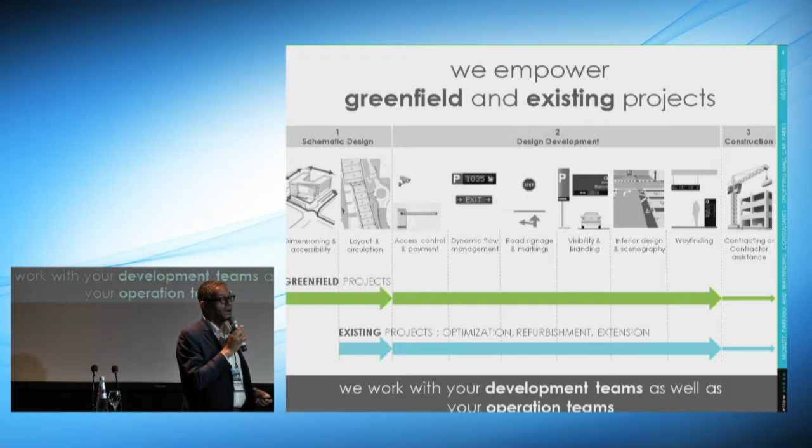On greenfield projects, we cover everything from how you dimension the car park, where you put it, why it should be underground or overground, and how you deal with the accesses and exits, where you put the ramps, how many, and why you should put them there.

Then when the structure is done, we move into the internal layout and circulation, then all the access control concerns, parking guidance, and dynamic flow management.

We also have a dynamic exit management, with sensors implemented on the exits that would detect eventual go-slows on exits and send the traffic to other exits.

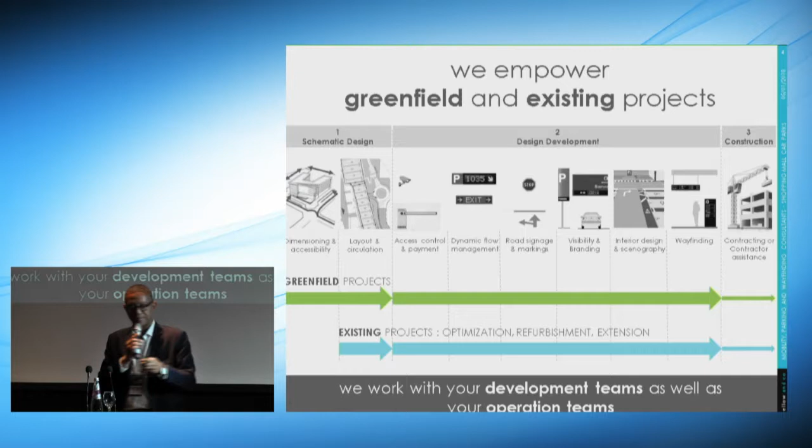Then once that is done, we have the enforcement and the standard signage, that's road markings and enforcement signage. And this is what I would call the customer experience or design/branding part of it, with branding the entrance and the visibility of the entrance, then differentiating the different levels or different parking pockets.

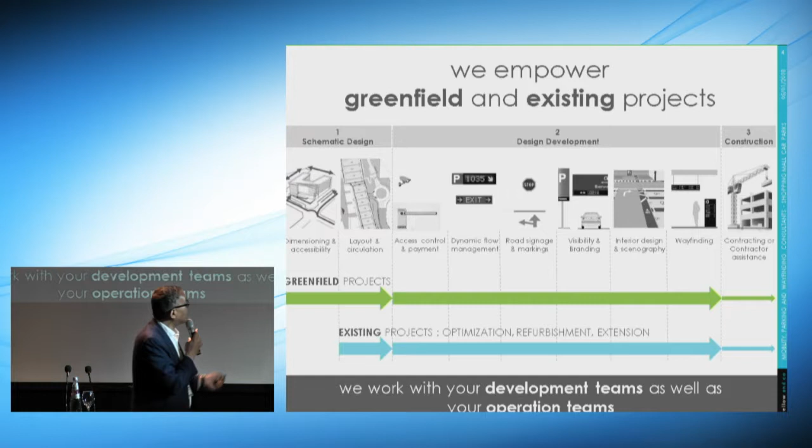And pedestrian wayfinding. Then the contracting, we will just be assisting your local contractor and not trying to replace him, in different countries where you have different languages and different cultures.

So we consider ourselves as parking designers specialized in shopping malls, for the simple reason that the customer who gets to the shopping mall, until he's gotten rid of his car, is just a potential customer.

He's not yet a customer because you cannot cash anything from him, you cannot sell anything to him. So he is actually the official supplier to the mall.

This means the car park is built to have the maximum amount of monthly subscriptions, and that means traffic that doesn't move. Cars parked, people know their slots, they know how to get in, and there's no problem. So to deal with this, you're actually designing to put the maximum amount of bays, because every extra bay you put in your car park is extra revenue.

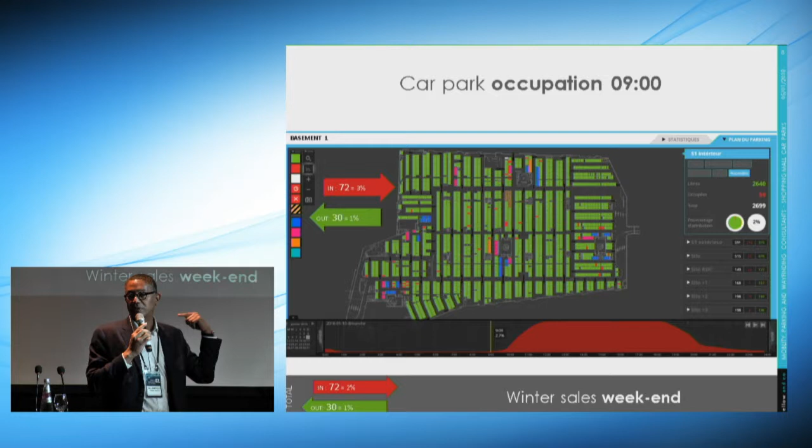So it's paid, but no one pays. It's actually just making sure that no one - since it's close to the airport - drops their car there when going on holidays. The other entry exit is here.

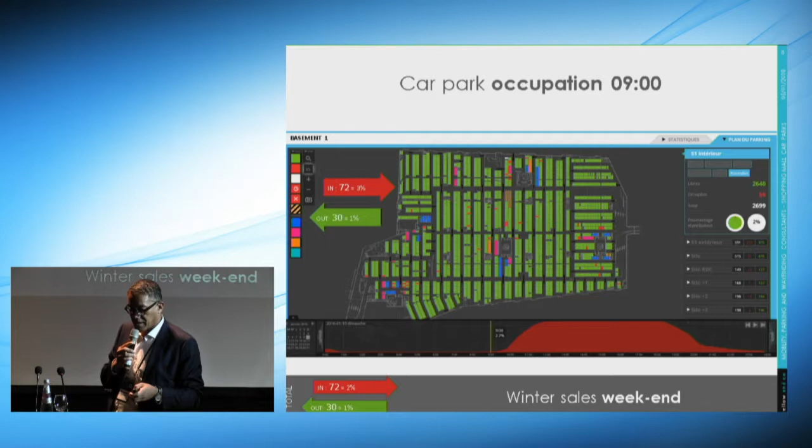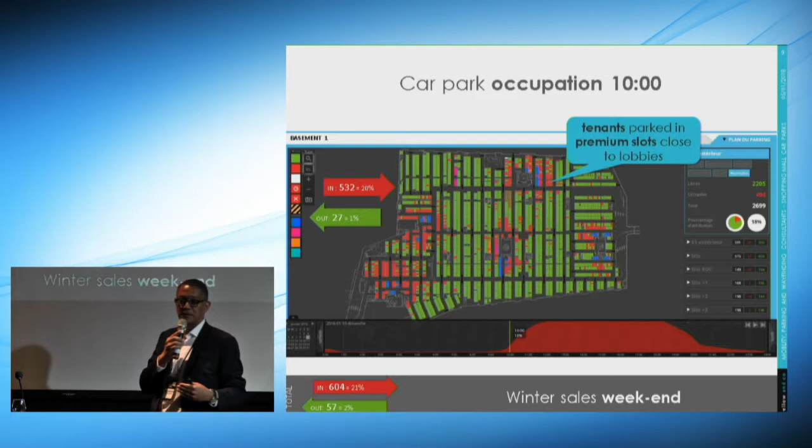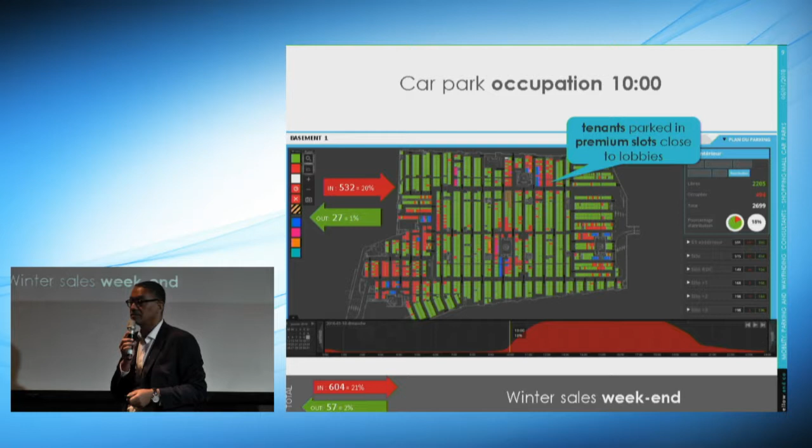So this is going to be what happens in the car park on winter sales weekend, meaning high attendance. It's 10 o'clock. The shopping mall opens at 10, so the cars parked here in red are cars that parked between 9 and 10 - these are most probably the tenants. In other words, the people working in this shopping mall are already occupying 18% of the car park and have taken all the premium slots, and they're not moving for the day. It's not very positive as far as sales are concerned.

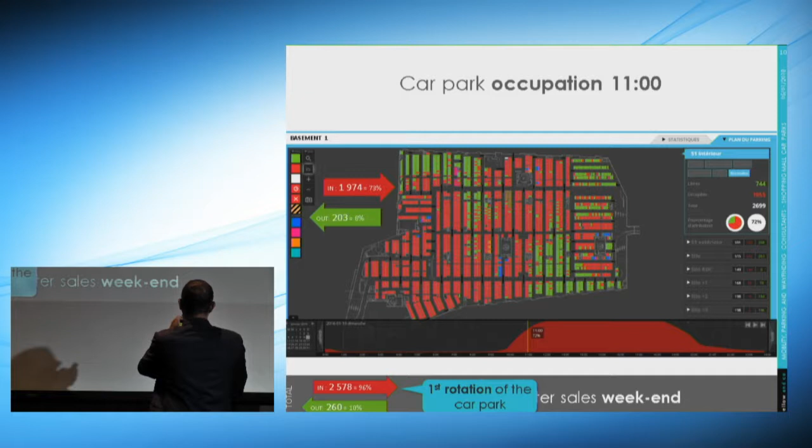We can see that customers are intending to come because just 1 hour later, we're already at 72% full. 1 hour later, that's 12 o'clock, we are now at 95% full. It's 1 o'clock, we're 98% full. It's 2 o'clock, we're 98% full again. It's 3 p.m., we're 98% full. In other words, nothing happened in this car park - it was just 98% full for the past 3 hours.

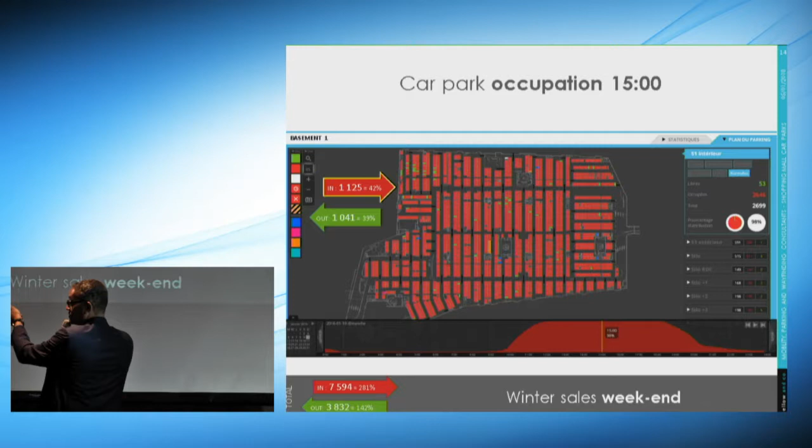No - we actually parked 1,125 cars in 1 hour, and 1,041 went out. This car park at 98% full, meaning only 53 slots available, actually received 1,125 cars and parked them. And to get to this, the answer is what you see here.

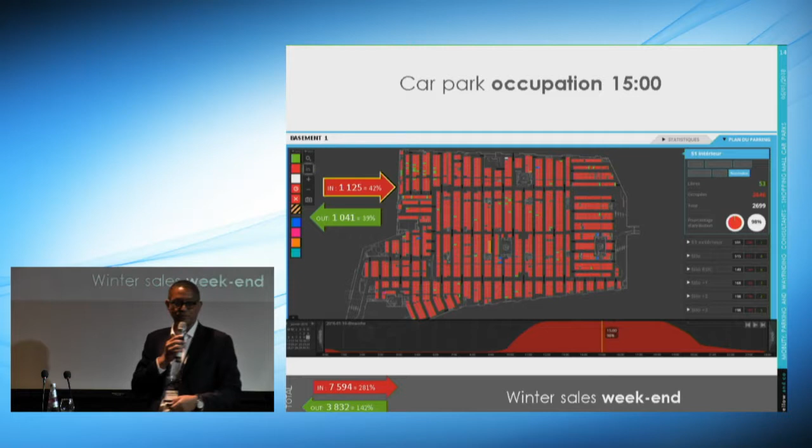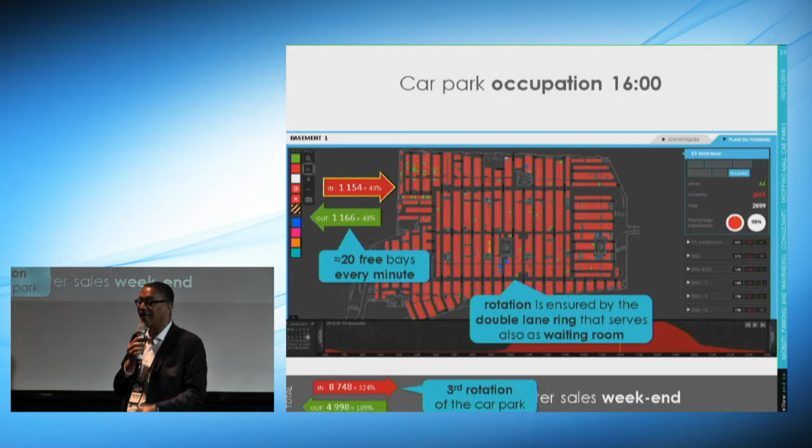This internal ring is actually what I call my waiting room. You came into the car park, it was full, but by the time you went around that ring twice, a slot was available and the parking guidance system drove you into it. If we just look, we actually have 20 slots being freed per minute. So whether you got into the car park and it was full, in a matter of 3 minutes I have 60 slots - I'm going to get you a parking slot. That's not a problem.

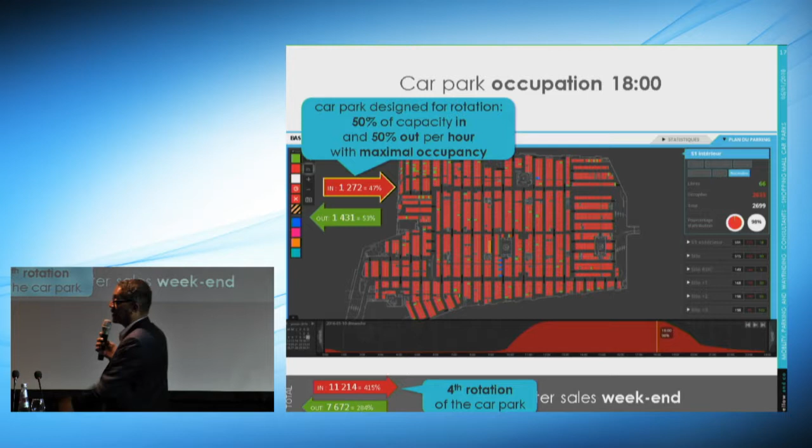So as you see, these numbers continue all around and last till the end of the day. So we consider rounding these numbers up by saying 50% of my car park comes in, 50% of my car park goes out every hour, simply because the average stay in such a shopping mall would be 2 hours. So it's just basic maths.

But this says that when we're designing the car park, we're designing it to have, in this case, 2,700 cars parked, and 2,700 cars - that is 50% each - driving in and out of the car park per hour. And that's the constraint. It's not parking the cars, it's the amount of cars driving in and out.

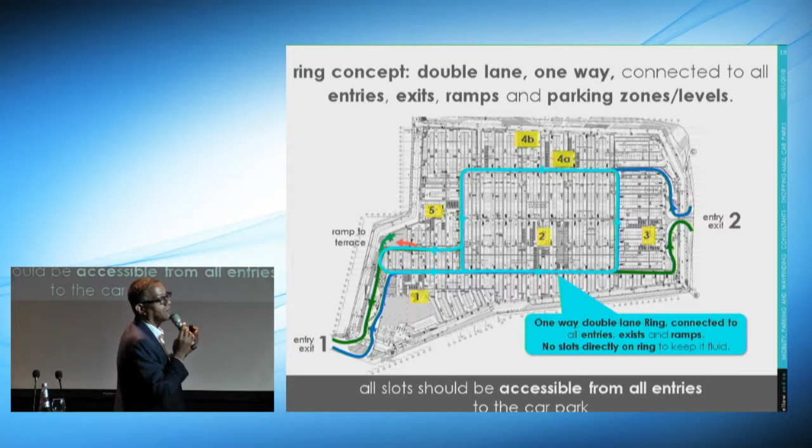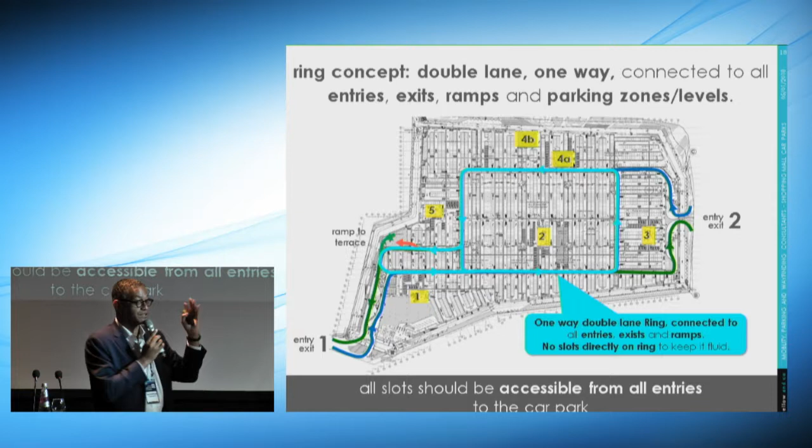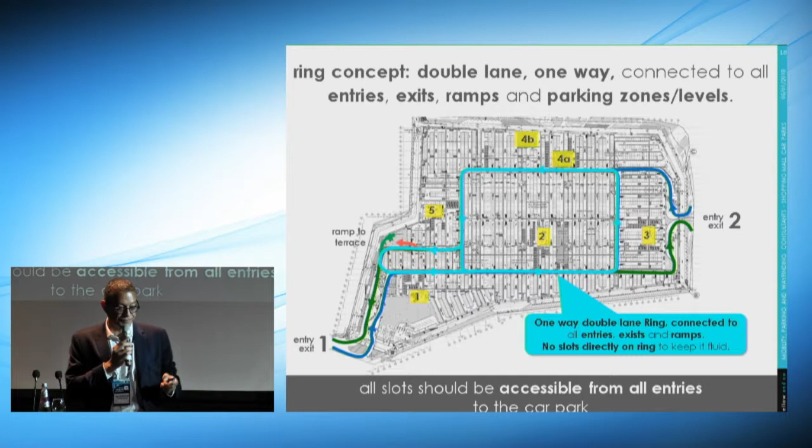What you're seeing here, this extra extension, is a dynamic ring extension. We have a helix ramp taking us to an overflow car park on the rooftop of the mall, which no one really wants to go to. But when the car park is fuller than 70%, we extend our ring in front of this ramp, signaling there are 300 or 400 slots up there. So it's your choice: turn around until you get a slot, or go up and get one directly. With this, we never have to shut the entrance of the shopping mall car park. That's the most important thing.

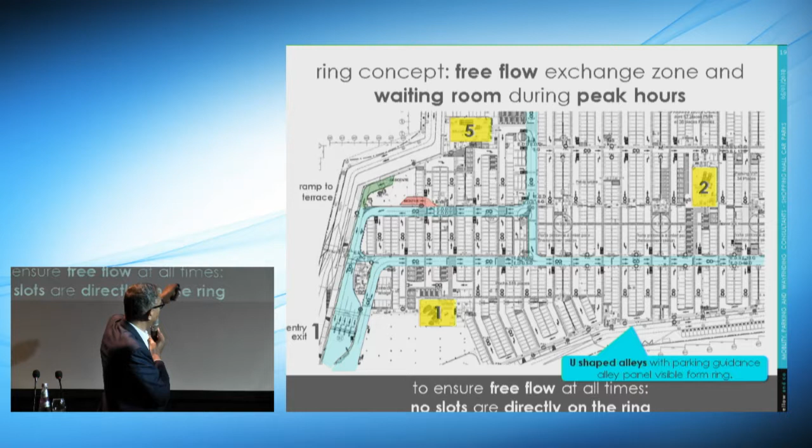We're seeing the details here. The ring is double lane, free of all parking slots. To park, you get into an alley, then you can park, and you can recycle in the alley because we route it this way. When you're coming in and all the slots are full, you'll be seeing red on the parking guidance panels, red, red, red, red. Then you see green, take it, park, and then get into the lobby. That's basically how the whole system works.

This one is going to give you a headache, but I just want to drive you quickly inside it. It's looking at... oh no, sorry, I don't have it. I removed the slides because it's really a headache.

Those slides basically calculated the amount of time customers take to find a parking slot. The answer is, on one Saturday, the cumulated time taken by all customers in a 6,000 parking slot facility was 5,000 hours looking for a slot. If the average speed in the car park is 10 kilometers per hour, your customers drove 50,000 kilometers looking for parking.

I think it's a lot. So our job is basically dividing that number by 2, by 3, by 4, making sure we park the cars as fast as possible and get them out as fast as possible.

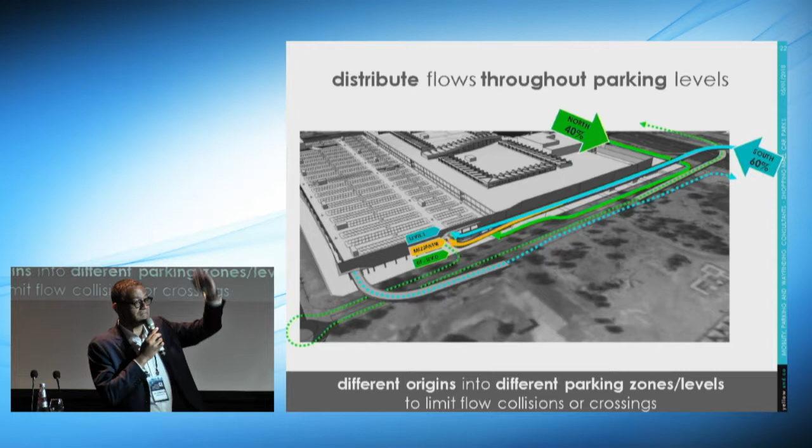So how do we design car parks for shopping malls? This is a shopping mall with a ground floor and a first floor. The height of a shopping mall is about 8 meters. The average height of a car park is about 4 meters, meaning that in the height of one level of shopping mall, I can fit 2 levels of car park. So I do have a mezzanine, and that's what we'll be seeing here: a ground floor, a mezzanine level of parking, and a first level of parking.

My flows coming from the north are about 40% of my traffic. There's a highway over there, quite a big one with about 5 to 8 lanes in each direction. So this one comes from the service road, turns in, and drives into the ground floor. When they're leaving, they leave from the ground floor, round the roundabout, and fly over, going back home.

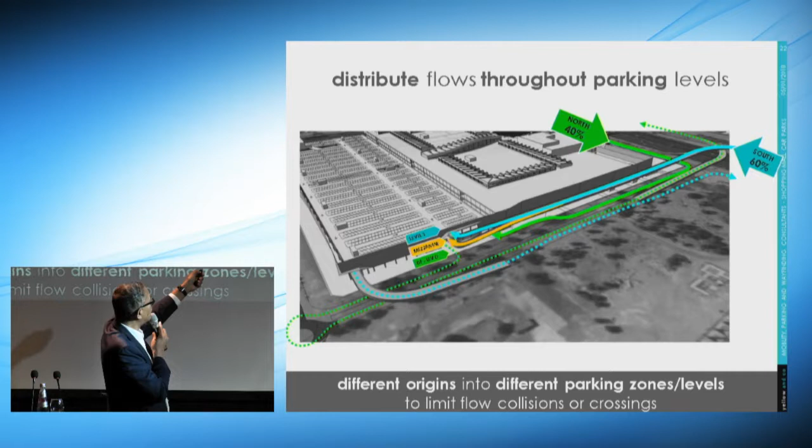My traffic coming from the south, which is actually 60% of my traffic, is driven over by a super flyover that flies over this one and in. But then we convinced the client that he was going to spend $1.5 million building this extra bridge to keep my flows away from the ground. His question was, why would I spend that money? The answer is quite simple.

If I had brought my traffic down to the floor, they would all enter on ground level, meaning 100% of my traffic is on ground level. When ground level is full, they would go to the mezzanine level. From the mezzanine level, our statistics say 80% of my traffic, pedestrians, go down, meaning they're getting into the mall on the ground level. In this case, it's only when the ground floor and mezzanine are full that I'd start having clients on the first level with direct access into the mall on the first level.

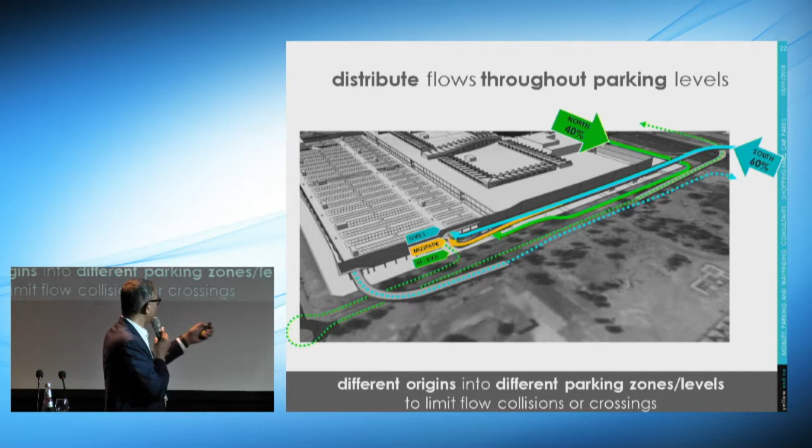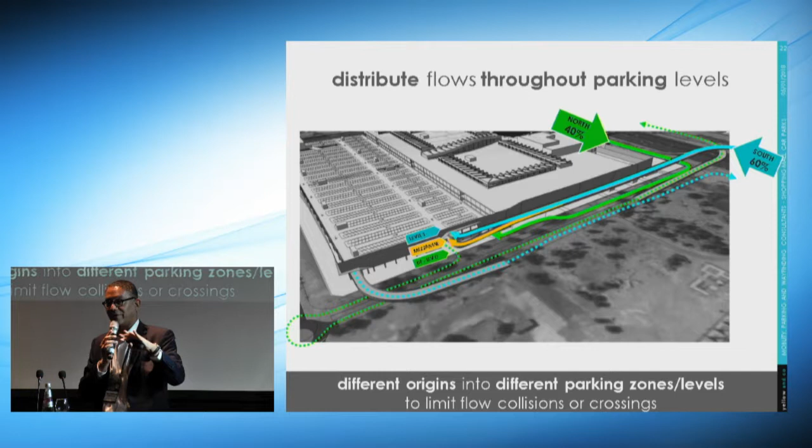With this system, by keeping this flow and taking them straight to the first level, on Monday morning at 10 a.m. when I open the mall, I have traffic parked on ground floor and traffic parked on first floor, both coming into the mall. That changes the rent of the whole first floor. So with that expensive bridge, he actually has no preferred floors in his mall—all of them have the same pricing value, and they see the same amount of customers coming in from all the entrances.

Any questions or reactions?

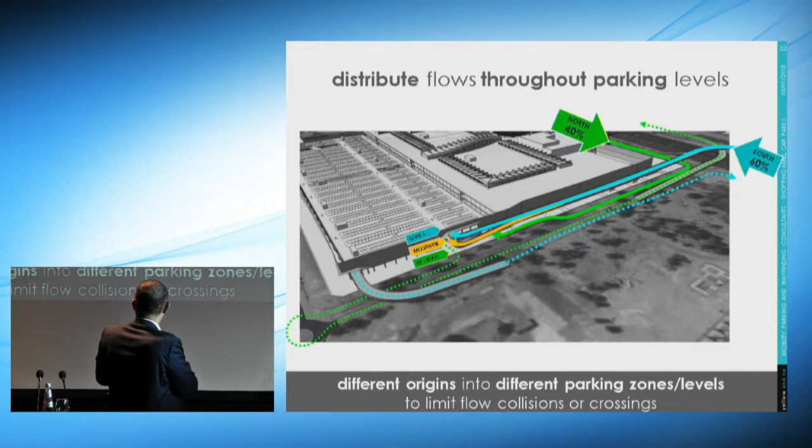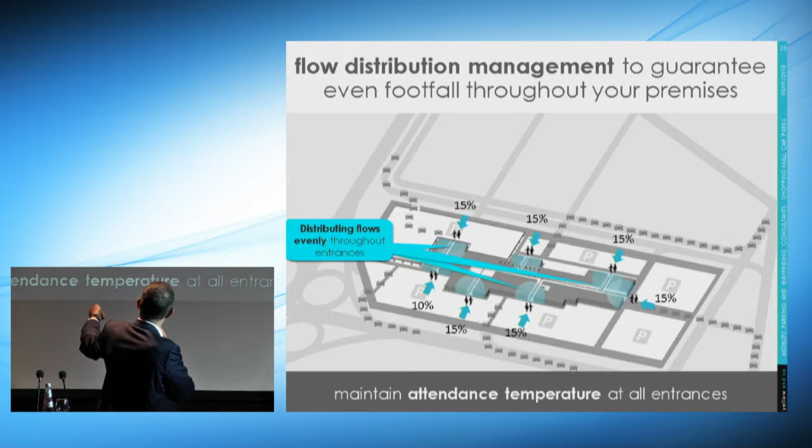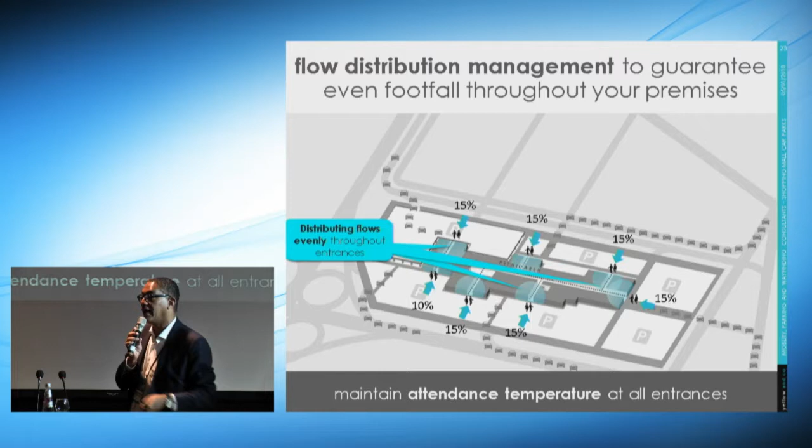Here's another example. Our goal is, we have traffic coming in, and what we want to do is share the traffic through the different car parks so that the entrances to the mall are delivering an average number. Because once again, if more traffic comes from one entrance, it's changing the rent, putting it at a higher price there, and the other shops have problems to run. So here's one example.

People who know the place will do what they want to do. But the newcomer who sees Carrefour this way and wants to go there, we will actually put a bit more traffic, maybe about 10% more here and 10% more here. This just balances the numbers and keeps those small shops that are on the way to Carrefour alive. So we're really using the car park to generate or rebalance the business in the mall.

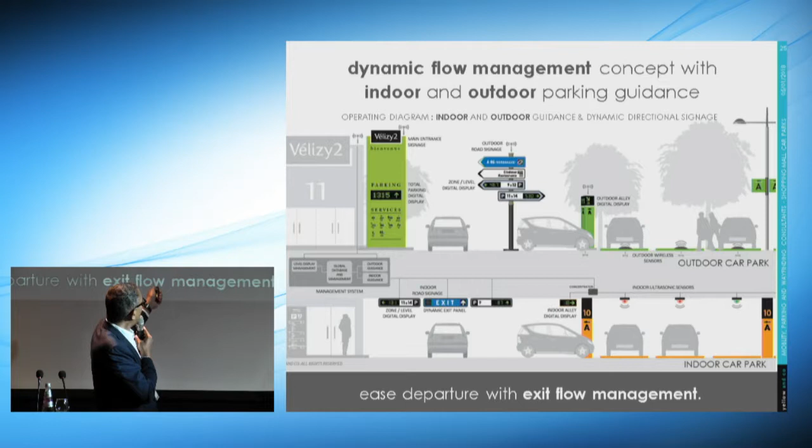This is the global system that we use in parking guidance. Everyone knows the indoor version, the sensors or camera-based, and the local panel that says whether or not you have slots available in that alley. All around the world, in most shopping malls I've visited, this is all that they have. This is the outdoor version with sensors, or today camera-based systems looking down, with the information here. These panels are actually the most important, because they tell you what car parks, what floors, what levels have available slots. And that's what you actually need. Once you're on the level, you will find your slot.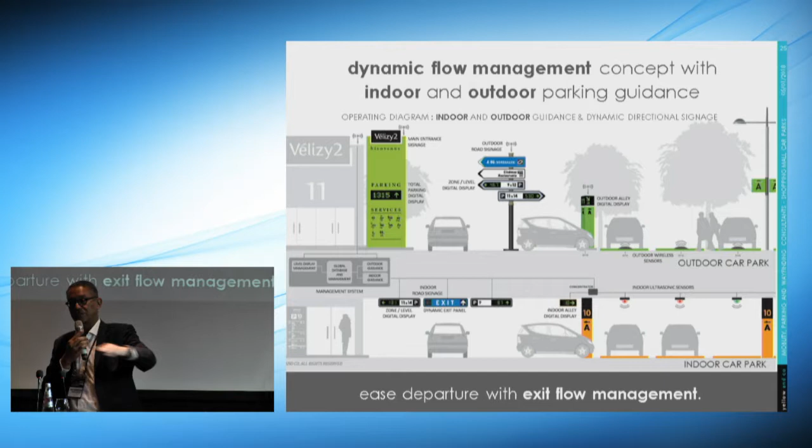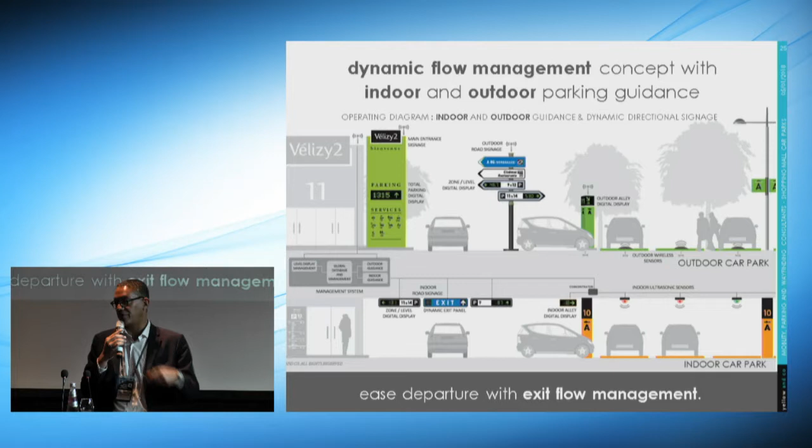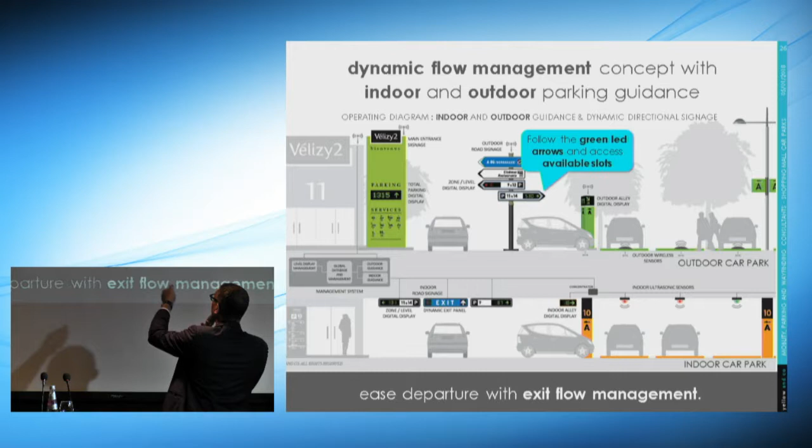When you're coming to this panel here, you can have both options. If it was full, that one would go red and that one would be green. So when you're coming in, it's basically follow the green arrows, and I give you a parking slot. That's the whole thinking behind this.

So this basically is the end of the first part. The rest will be just a few examples that I want to share with you.

What we're seeing right here is the rooftop of a shopping mall. That means usually the car parks no one wants to go to. The first thing is it's full, the second is there's no traffic, no one fighting, even on a very high attendance day. That car over here most probably should be coming from this alley over here. Once it's gone, we will update our digital panels and send some traffic back up to deal with this.

It will not forcefully appear with only one slot available. We will wait until we have something like 10 or 12, and then we reopen, getting the panels to bring you in. There you are, this is showing you, just as an example.

This is showing you Centro, a shopping mall in Oberhausen, Germany. It's 260,000 square meters GLA. It's actually the largest shopping mall in Europe, with 12,600 slots for a shopping mall, almost the same amount of parking as Dubai Mall in Dubai.

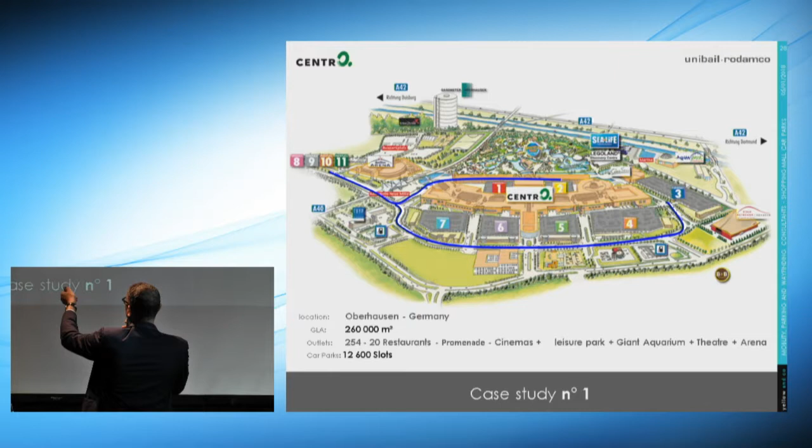This shopping mall is actually everything that's orange over here, with a restaurant bar around the canal and the leisure area. The car park we want to look at, you have 1, 2, 3, 4, 5, 6, and 7 — that's about 9,000 slots. The other 8, 9, 10, 11 are close to the arena and can be used as extra overflow for the mall, or for the arena when there's an event.

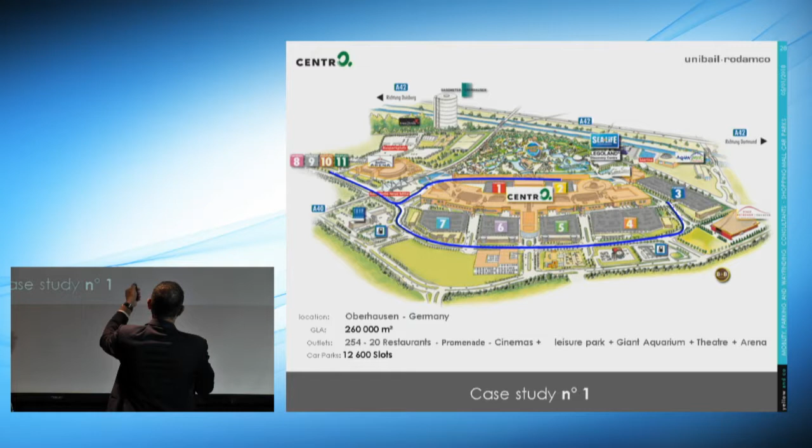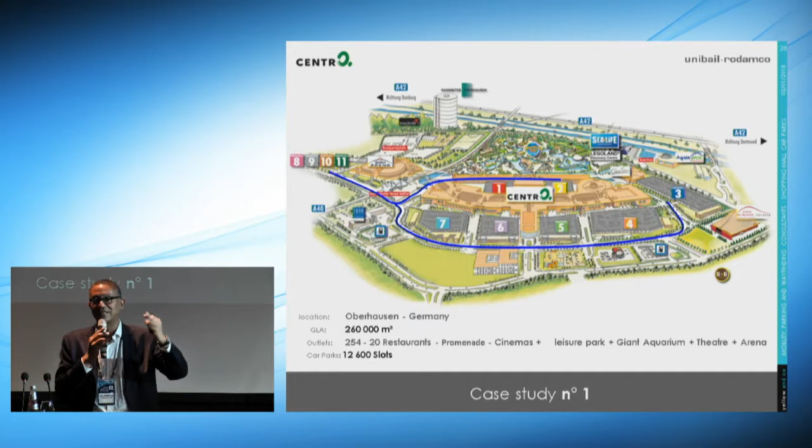So that gives us 1,800 cars trying to get out of this car park. That's 2,500 slots, all at the same time.

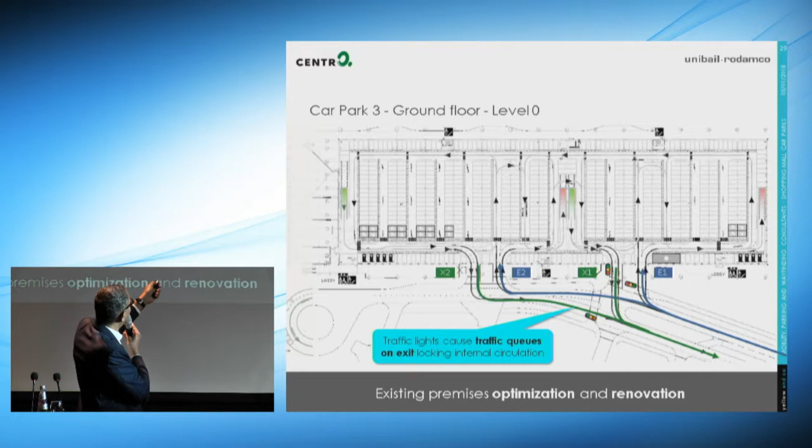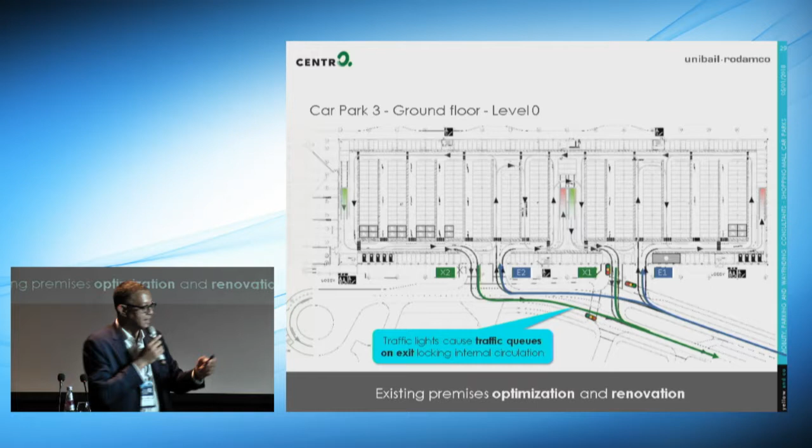I have 2 parkings that are identical, so I have an entrance here and an entrance here. But since this flow is crossing, I have a red light. When the theater lets go its traffic, I have 1,250 cars trying to come down this ramp and go here, and this red light actually gets them to jam all the way up and block the whole car park.

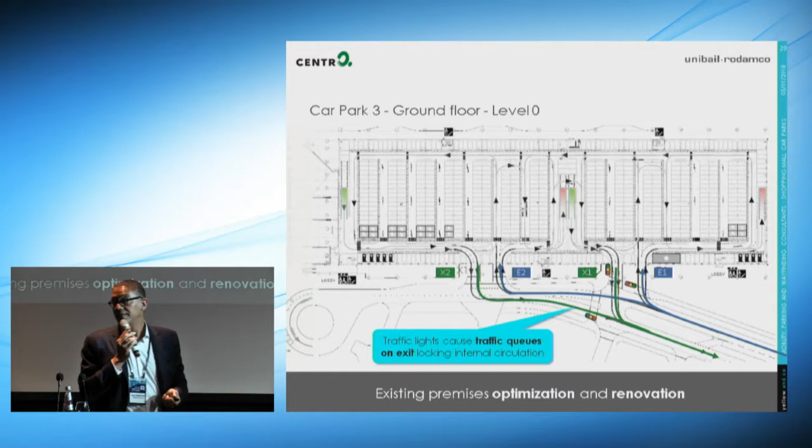So the problem with that is you're not getting your new traffic in, you're not emptying the roads, you can't get your traffic out. So the first thing we did is we said we're putting all our entrances here, exits here.

So you get rid of the red light and you can push traffic in here and everyone's coming out from here. The only weak point with this is that we're now using only 1 ramp to bring our traffic down, and if anything happens here, we have to use this ramp and it's going to be complicated.

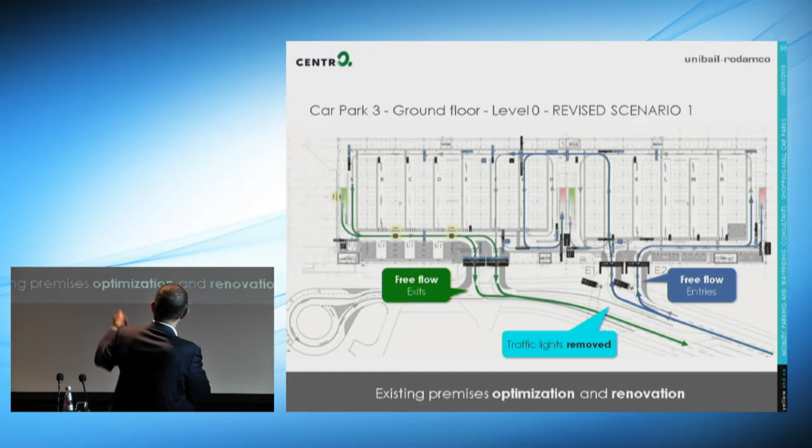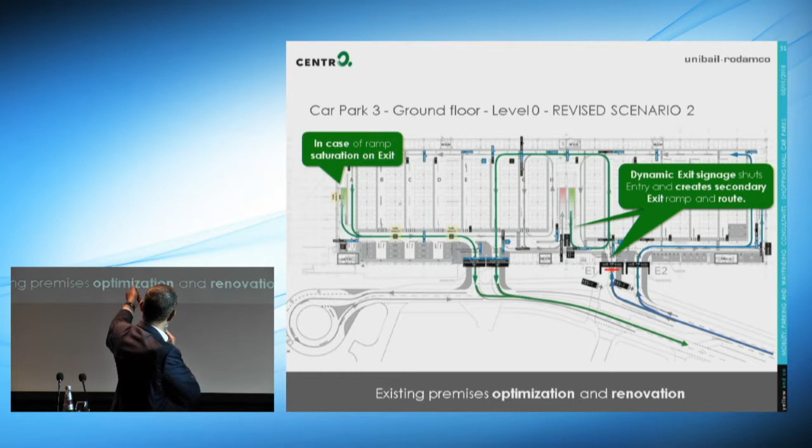So what we did is we put sensors here. If we ever have a go slow or something slowing down, we would close this entrance, using dynamic panels, using this as an exit, and we will drive our traffic this way and they take the exit.

It does happen that this is the day the system was installed. We're in Centro, and I was just driving to the place. I did put a reflex, put my GoPro on, and as you see, we have 1 entrance that's open and 1 that's closed. We were in the dynamic exit mode.

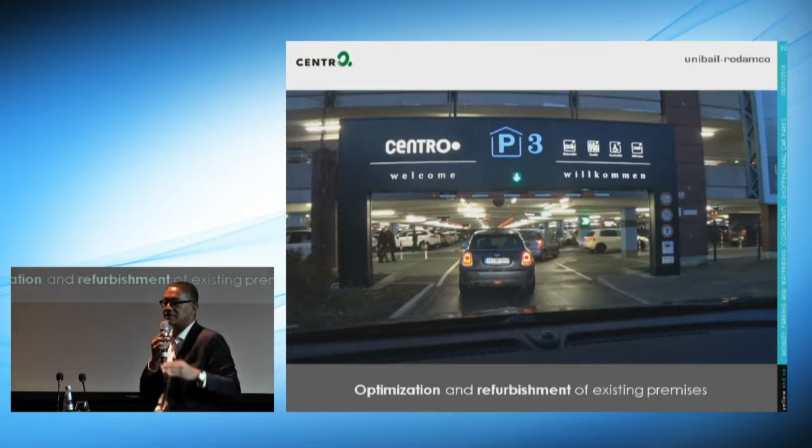So we're driving all our traffic to here. As you see, we've added extra LED chevrons that you'll be seeing here also. We have a panel here, but these LED chevrons are used when we want to emphasize a direction. So this car park is entirely designed and refurbished by us from head to toe, including all the floor paintings, wall paintings, signage and panels.

So as you're coming in, it's red when it's full, pedestrian signage on top of the pedestrian walkway, then the information telling you what's going on above, repeated on the dynamic LED chevron. The 800 slots are available up there.

We drive up, and you would see that as soon as you get in, there are cars on the ring, but it's still running, so no big deal in this case. You will see that we do have here an extra chevron. If we wanted to influence our flows, we would just get that panel to blink, and you'd see that 30% of traffic would just start going up directly.

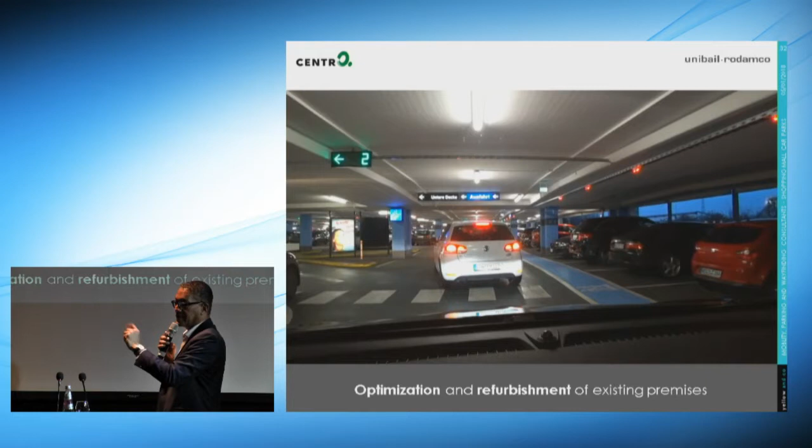So as we're going forward, you will realize that there's going to be a bit of jamming down here with this car that's hesitating. He knows the place. The arrows here are saying that the exit is down. This is saying that the exit is down. But as I said, it was just installed, so it's not blinking yet. And the fact that it's not blinking is getting him to hesitate, because as you will see, there's a bit of traffic in front of him and it's getting slow.

So I am taking the exit route, the secondary exit route that he would have done. The only thing missing here was the blinking. And you'll see that I would basically have a freeway out.

I don't have any entry flows coming from here since my entry is closed, or my entry is over there, getting me to use this alley alone. And basically, I'll find my way out of this car park.

And this can stay like this for 10 minutes because it doesn't require any human action. It's all dynamic and automatic. So the first chevron is the one taking me to the ramps that go up. This one is taking me out.

And you will actually realize what was the cause of the go slow. If you're looking in this direction, you will realize that we have quite a few pedestrians walking here. And these pedestrians walking in the car park are actually slowing the exit lane to an extent where the sensors detected that and have switched it. There we are.